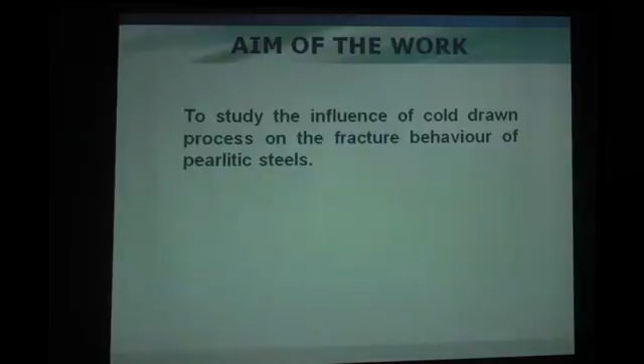I am going to divide my presentation into 5 parts: introduction, experimental procedure, experimental results, discussion, and conclusion. I missed the pointer, but let's go. First part, the introduction. The aim of the work is to study the influence of the cold drawing process on the fracture behavior of pearlitic steels. This manufacturing process induces heavy plastic strains in the steel just to increase its resistance.

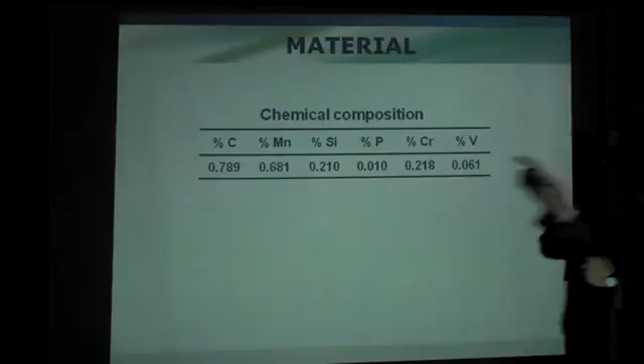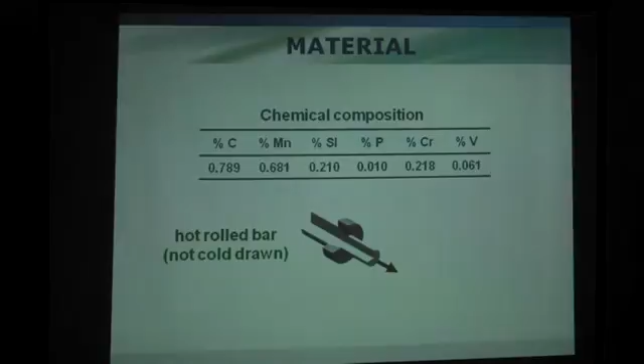The experimental procedure, chemical composition. This is a quasi-eutectoid steel with, roughly speaking, 0.80% of carbon and other chemical components, and the base material is a hot rolled bar, not cold drawn at all. And after several stages of cold drawing, we obtain a heavily drawn material after 6 drawing steps. Cold drawn steel, commercial prestressing steel, after 7 steps of drawing with a cumulative plastic strain of 1.1.

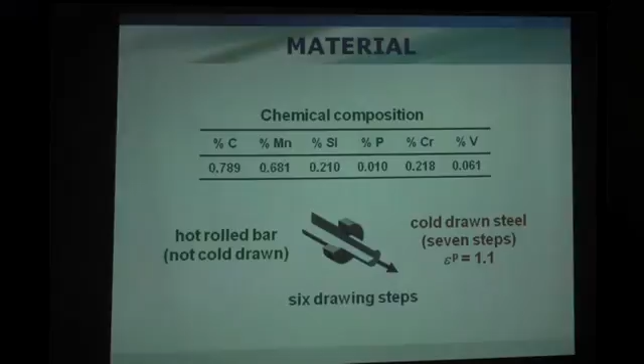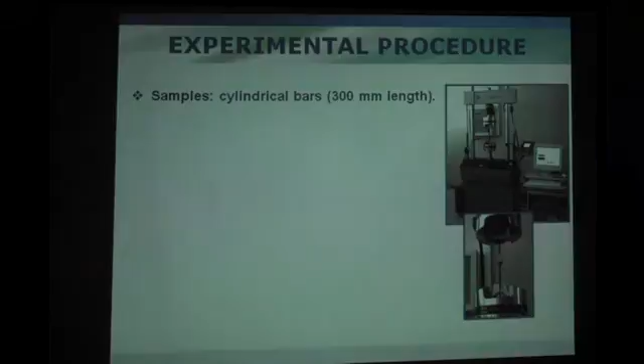Now the experimental procedure, we use samples as cylindrical bars of 300 mm length. This is the universal testing machine for fracture mechanics analysis. We pre-crack by tensile fatigue with sinusoidal wave under load control and decreasing load in steps. Typical frequency of 10 Hz and R ratio equal to 0.

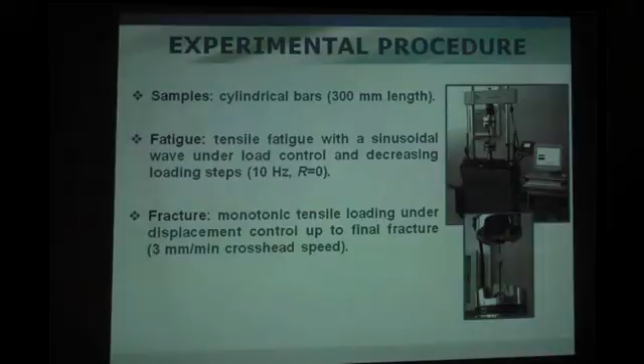No overload. We don't believe in plasticity crack closure, as you know, but we discussed it in Malaga heavily. This topic was heavily discussed, and I propose in 2 years to organize, Luca had the same idea, 2 parallel sessions, believers and non-believers. And probably George will be here in 2 years.

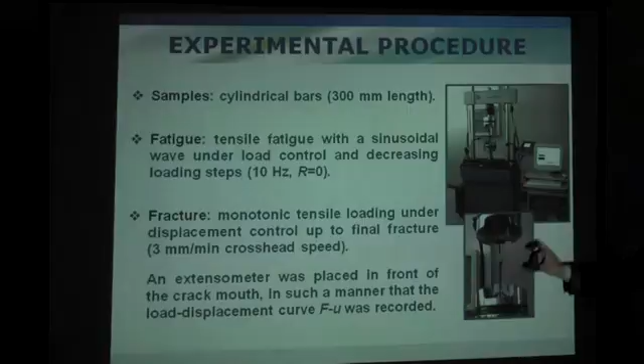Fracture, monotonic tensile loading under displacement control up to final fracture, 3 mm per minute crosshead speed. A typical fracture mechanics test. This is not a standard fracture mechanics test because they are thin wires, and an extensometer was placed in front of the crack mouth in such a manner that the load-displacement curve F-u was recorded. And now we have the records after this experimental test.

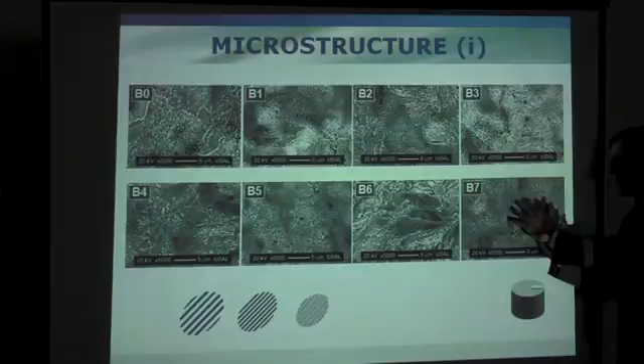We have the experimental results, but let me explain first about the microstructural evolution. The steels are called B0, B1, B2, B3, by the number of drawing steps undergone by each steel, 4, 5, 6, and 7 drawing steps, the heavily drawn commercial prestressing steel. And with regard to the transverse section, no effect of cold drawing could be observed. Only an increase of packing closeness with decrease of interlamellar spacing, but no orientation.

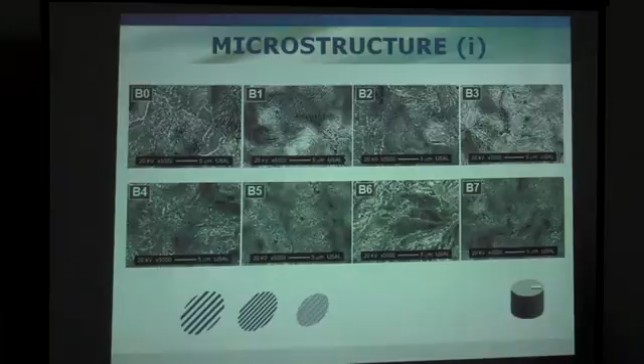Both pearlitic colonies, the set of lamellae equally oriented, and pearlitic lamellae, ferrite-cementite lamellae, are randomly oriented in the transverse section. But with regard to the longitudinal section, we have a clear evolution towards a markedly oriented microstructure, a quasi-fiber reinforced material.

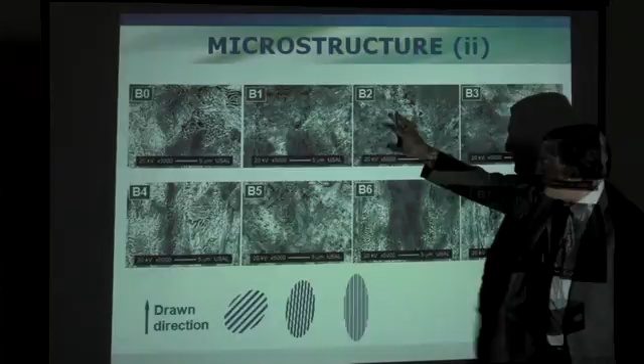This is a microstructure like a composite material, heavily drawn, and we have a clear progressive geometrical evolution of the two microstructural levels, both pearlitic colonies and pearlitic ferrite-cementite lamellae, and we have a progressive orientation of the colonies, and progressive slenderizing.

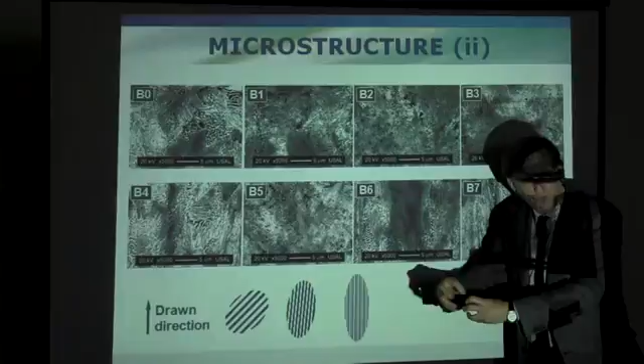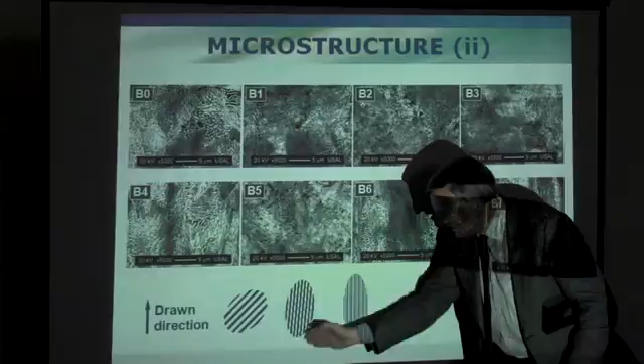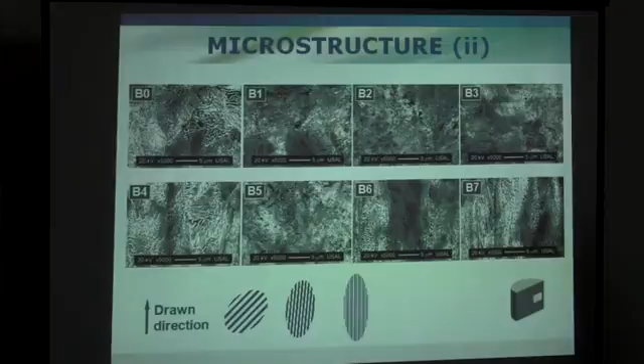They become more slender in the drawing direction, and the lamellae are also progressively oriented quasi-parallel to the drawing direction, or z-axis, in the final stages of drawing, and there is a decrease of pearlite interlamellar spacing, which means an increase of packing closeness, as in the case of the transverse section. But in this case, we have the clear orientation. It is a markedly oriented material in the drawing direction or z-axis, with consequences in fracture.

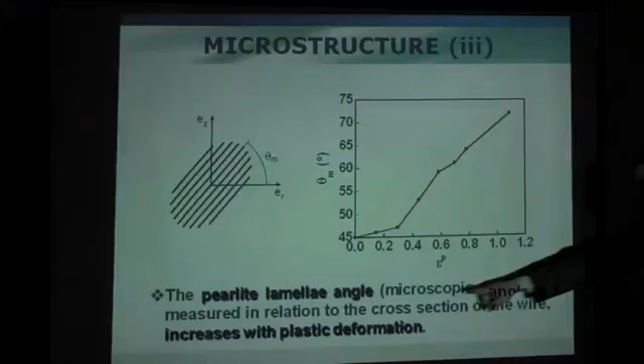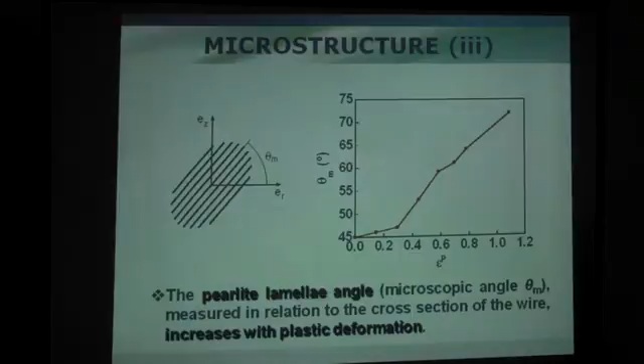Here we have evaluated the pearlite lamella angle, microscopic angle theta m, measured in relation to the cross-section. It increases with plastic strain, and it increases with cold drawing. With this imposed plastic strain, in heavily drawn steel, the angle of orientation in relation to the transverse direction increases.

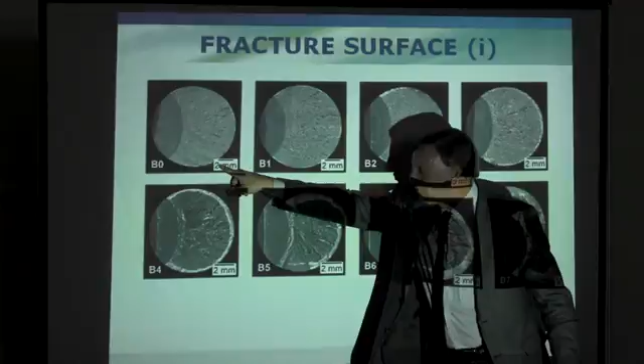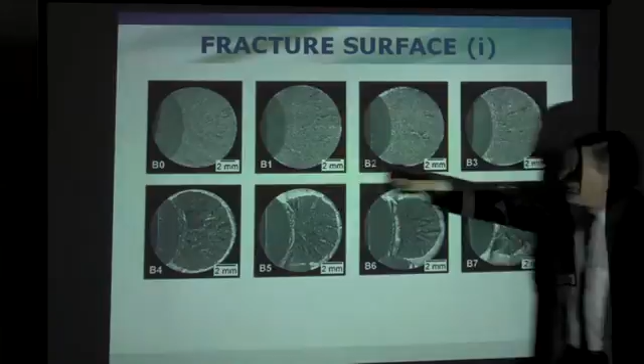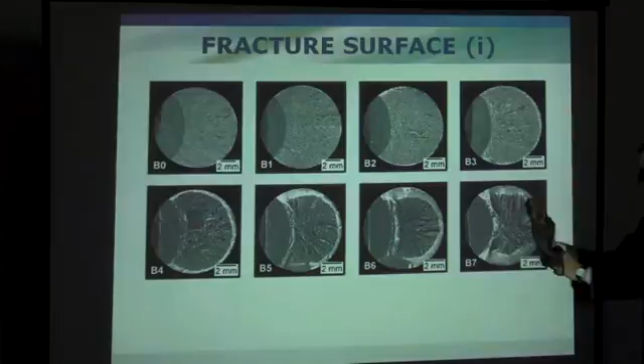Here the appearance of the fracture surface with the evolution of progressively drawn steel. Hot rolled material, not drawn at all, shows mode 1 fracture, purely isotropic; slightly anisotropic in the first stage of drawing, but roughly speaking it still breaks in mode 1 and is still isotropic. From 4 steps to 7 steps of cold drawing, we have a progressive anisotropic effect with crack embryos, crack branches, crack deflections, and a very stepped, very rough fracture appearance because of the microstructural orientation.

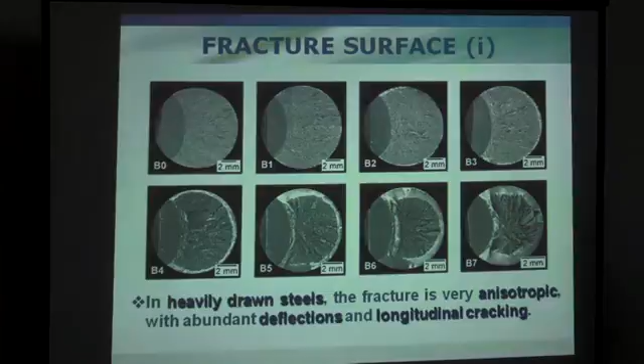In heavily drawn steels, the fracture is very anisotropic with abundant deflections and longitudinal cracking. Longitudinal splitting or delamination between two similar microstructural levels, either the colonies or the lamellae themselves.

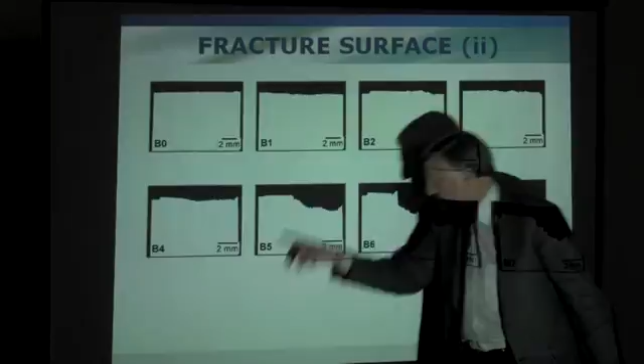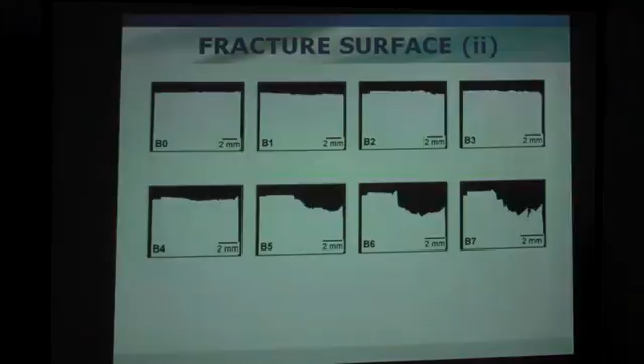Here we have the profiles, quasi-isotropic behavior up to step 3 of drawing with increase of roughness, and the anisotropic deflection effect appears from B4, 4 steps of drawing, clear in B5, more pronounced in B6, and very marked in B7 with a very stepped fracture surface and a crack deflection angle, microscopic angle, reaching almost 90 degrees, quasi-parallel to the drawing direction or y-axis.

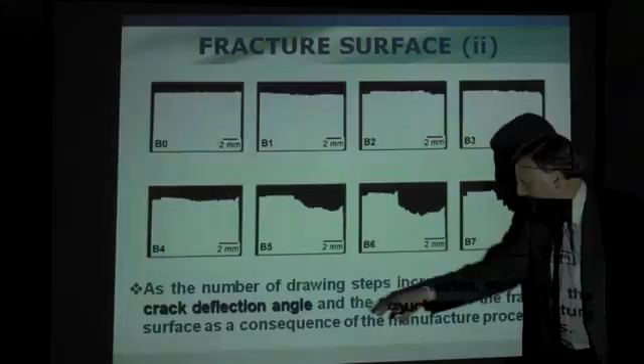As the number of drawing steps increases, so does the crack deflection angle, the microscopic angle. We spoke about the micro angle in the previous slides, and the roughness of the fracture surface as a consequence of the manufacturing process.

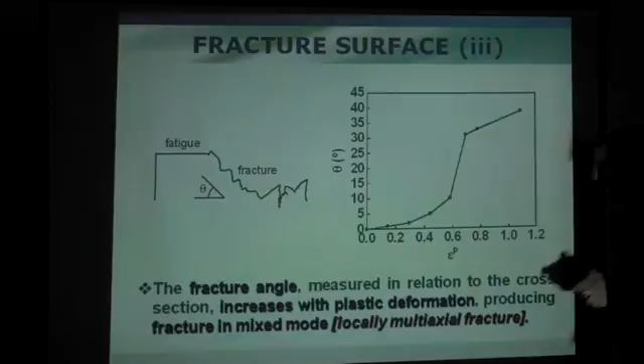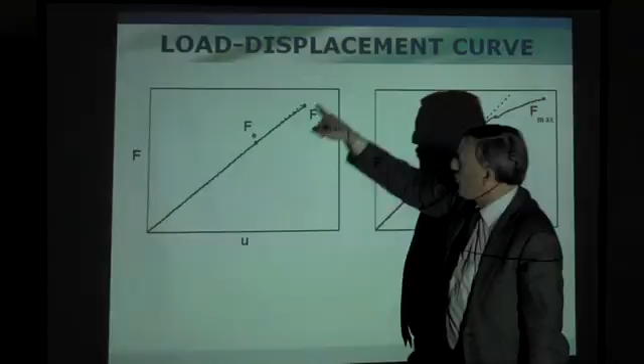And here the load-displacement curve for 0 to 4 steps of cold drawing, slightly drawn steels or hot rolled material not drawn at all. Mode 1 behavior was a linear plot, and we have a non-linear plot for heavily drawn steel, but it's not caused by plasticity. To a certain degree, yes, but it is very confined. It's a low level of plasticity.

We define Fy and Fmax, and Fy is linked with the pop-in phenomenon. A pop-in produced by a burst, by sudden anisotropic tearing. This is when the embryo of crack deflection appears here at Fy, and we obtain the pop-in, but we still have load-bearing capacity of the wire.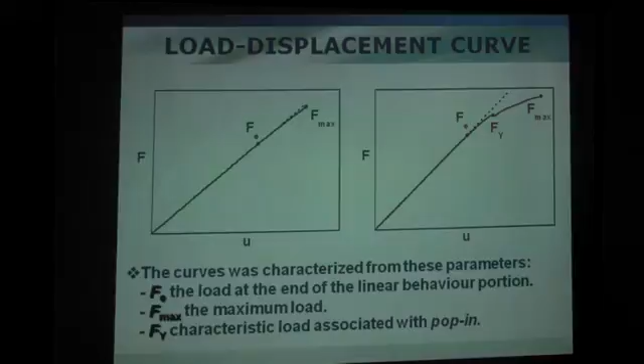Then we define the maximum load, and the limit of the linear or elastic behavior, Fy, which is not plastic yielding but micro-tearing by an anisotropic source. This is crack splitting or delamination. We have observed this phenomenon by stopping the test and performing an analysis of fracture paths or crack paths with metallographic polishing. We call it fractomaterialographic or fractometallographic analysis.

And now we use the mathematical equations of the French school long ago, Amestoy and others, I think. We use the local crack tip field, the local stress intensity factors, minor k1 and k2, with a matrix as a function of the global, in the fracture mechanics sense, K1 and K2. We define the energy release rate as a function of the local k1 and k2, and with this we have a directional J, a directional energy release rate, and on the other side we can retake the theoretical or mathematical, not physical, concept of fracture toughness or pseudo-toughness or critical stress intensity factor with directional properties.

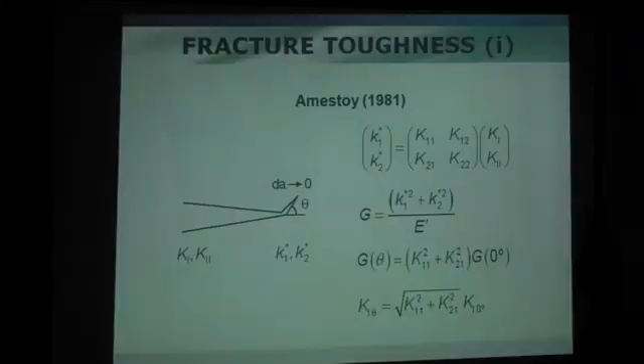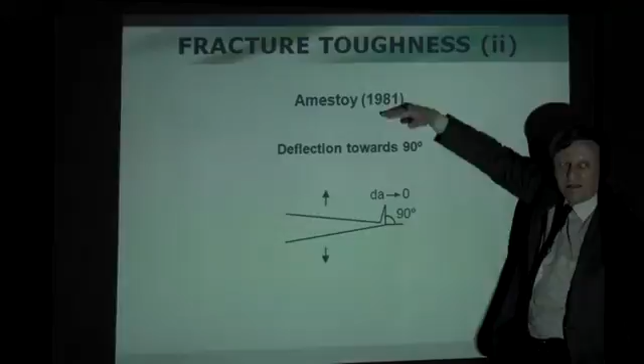K1 theta as a function of the K1 in zero direction, in transverse direction. Yeah, this is the hypothesis of our group. This is not by Amestoy, sorry. We use the mathematical equation by Amestoy, but we produce this deflection towards 90 degrees.

We neglect this small branch, the pop-in of crack delamination, the debonding, splitting. This splitting path parallel to the drawing direction, we neglect, and we consider the second branch, they are very small, the limit to zero of this angle, to obtain the directional toughness. Then, our approximation or assumption is we neglect this part, the pop-in, the splitting, and we consider just the branching, the deflection microangle for initiation of an anisotropic fracture.

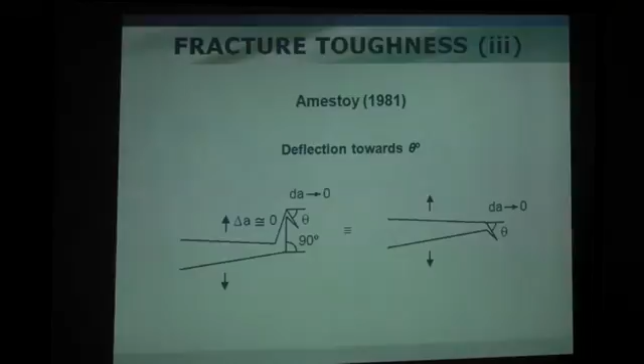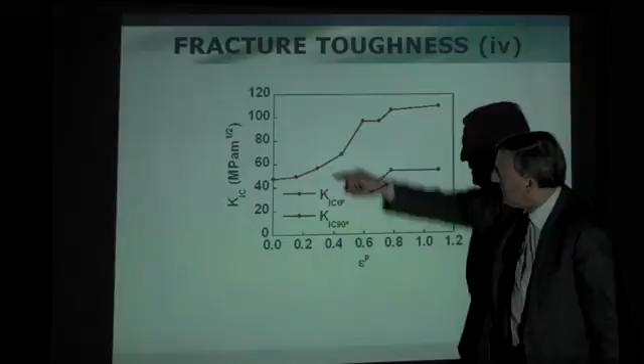With this consideration, we have two papers, Toribio and Pariente. One of them, the longer in Engineering Failure Analysis, explaining this procedure on the basis of the Amestoy and co-worker equation. And with this, we will finally obtain the K1C, or critical stress intensity factor, because the concept of toughness with mixed mode propagation could be dubious. Really it is a dimension with dimensions of K, but this is an energy release rate, directional. And we obtain this pseudo toughness in 0 degrees and 90 degrees and for any degree.

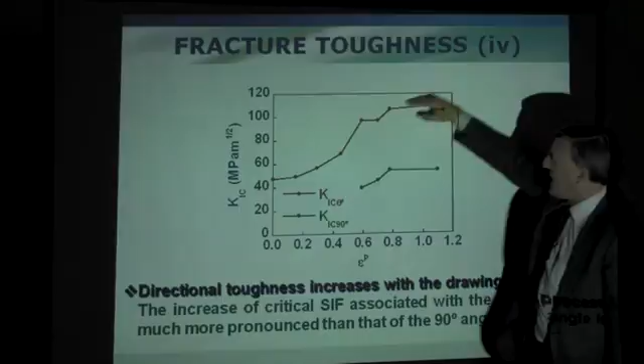Then we obtain the following ideas interpreting this plot. A directional toughness or a directional critical stress intensity factor or a directional energy release rate which increases with the drawing process. The increase of critical stress intensity factor associated with the theta angle is much more pronounced than that of the 90-degree angle. Okay? Here we have a clear increase, but in 90 degrees we have similar energies independently of cold drawing for splitting or delamination. That's logical for the debonding.

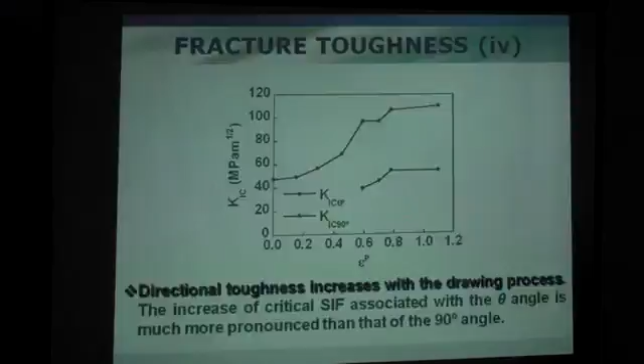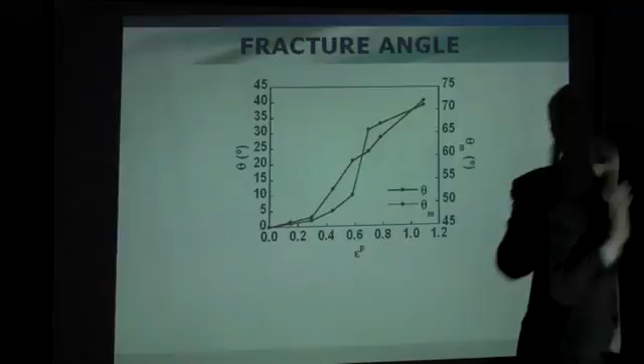And finally, the discussion of this plot with regard to angles, a beautiful plot, the macro and micro. Pearlite colonies and lamellae, crack deflection. They really have the same trend. It's really a nice approach. Then we have the macro-micro relationship typical of materials science.

We are entering materials science and leaving fracture mechanics. We can go to the restaurant.

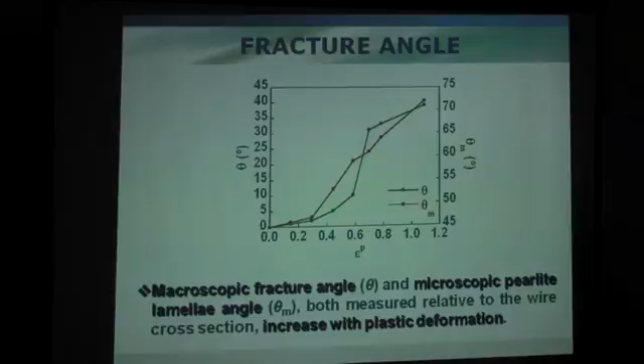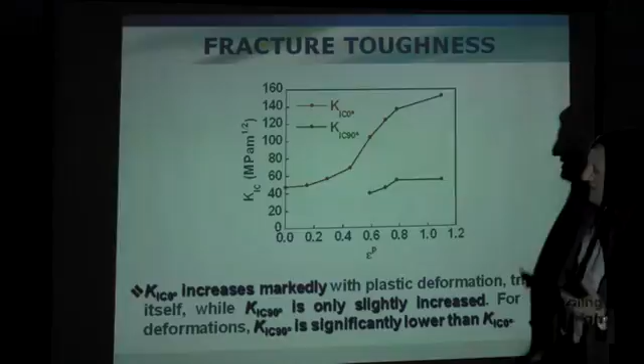Macroscopic fracture angle theta and microscopic pearlite lamella angle theta m, both measured relative to the wire cross-section, increase with plastic deformation, with a similar trend of evolution. It is really nice. And with regard to the toughness, we could define this pseudo toughness, directional toughness, directional critical stress intensity factor, directional energy release rate, K1C 0 degree, the transverse, increases markedly with plastic deformation.

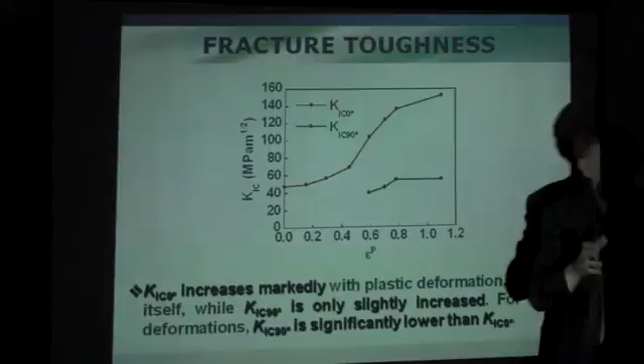Then the higher the yield strength, the higher the cumulative plastic strain, the more intense the cold drawing, the higher the toughness, the transverse toughness. Then cold drawing not only improves the yield strength, the classical resistance, but also the fracture toughness in transverse direction.

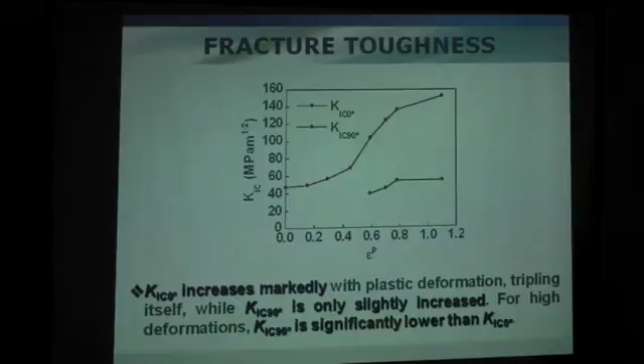But the problem is this splitting, this crack branching, the debonding or delamination, because K1C 90 degrees is only slightly increased, it's almost constant, roughly speaking. There is no improvement with regard to the debonding or the delamination. That's sad, but that's what happens. For high deformation, K1C 90 degrees is significantly lower than K1C 0. This is the weakest phenomenon. That's the problem with prestressing steel. This is anisotropic fracture.

And now let's go to the conclusion. The chairman is standing up, but we finish.

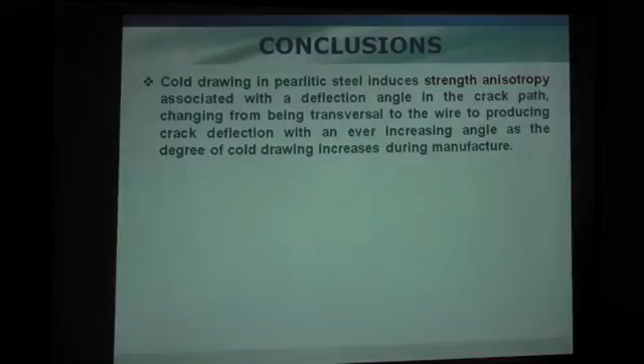Cold drawing in pearlitic steel induced strength anisotropy associated with a deflection angle. This is the debonding, the delamination in the crack path, the crack path changing from being transversal to the wire to producing crack deflection with an ever increasing angle as the degree of cold drawing increases during manufacturing. The directional toughness or directional critical stress intensity factor, or directional energy release rate, depends on the macroscopic deflection angle of the fracture crack path, that angle being in turn a function of the microstructural orientation angle of the pearlite lamellae, as a consequence of the microstructural orientation induced by the manufacturing process by cold drawing.

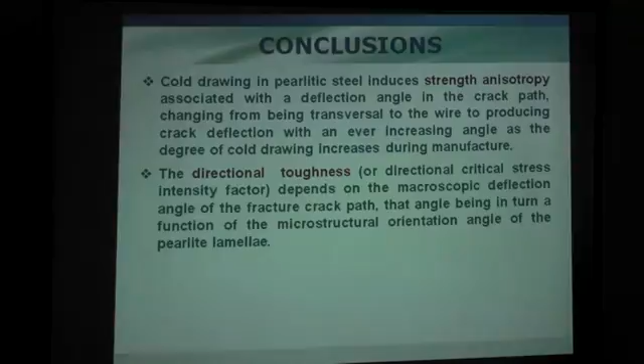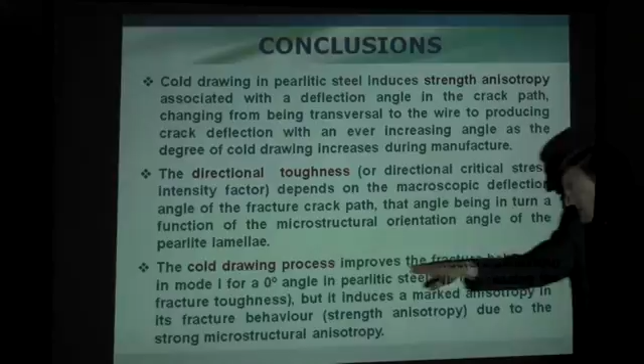Then cold drawing is beneficial. We have known for a long time it increases the yield strength. This is the final point of manufacturing. But in addition, and manufacturers are not aware, it improves the fracture behavior in mode 1 and the classical fracture toughness for the transverse zero angle in pearlitic steel. But it induces a marked anisotropy in its fracture behavior, a strength anisotropy, due to the strong microstructural orientation, the strong microstructural anisotropy. And that's all.